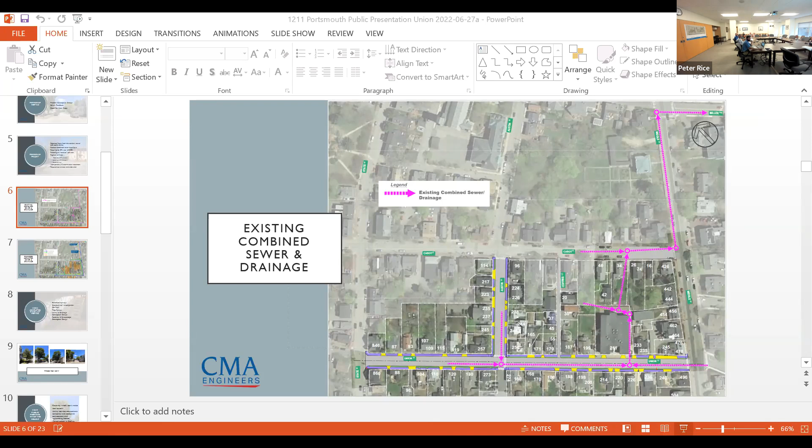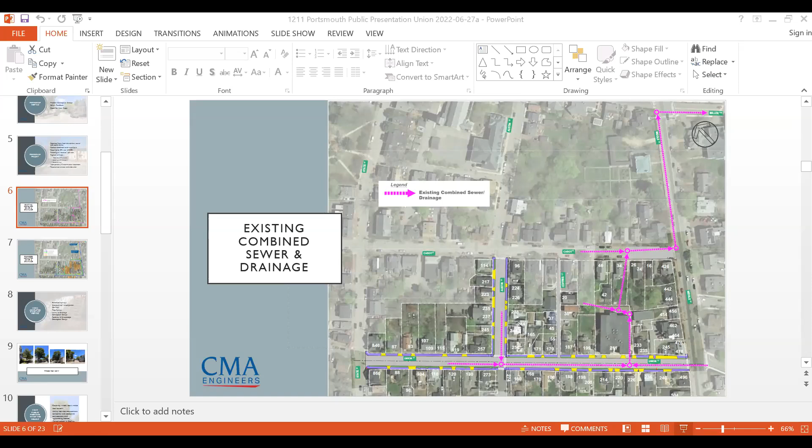Ask Eric. Yes, Eric, are you there? I'm here. What are you able to see? I'm able to see the presentation with the slides on the left. Can you go full screen to make the main slide bigger? There you go. Okay, so this is full screen for you? Yes. Okay, again, very sorry. You'd think we'd know Zoom by now. Well, now we got it.

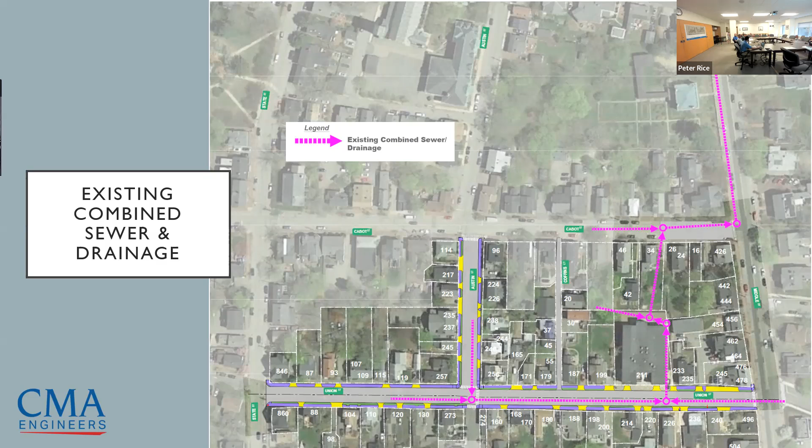So I think we'll revisit some of the non-text slides and graphics. This is the existing combined sewer and drainage. Right now it runs back lot around 211 Union, out by 34 Cabot, out on Cabot Street. One of the main objectives of the project is to separate that water and sewer and also eliminate the back lot run, where people from Coffin's Court and people along both Middle and Cabot all connect back lot across other people's lots to the sewer. So we're going to reconfigure that with what's shown on the next slide, with a new separated drain and sewer where everything's in the public right of way.

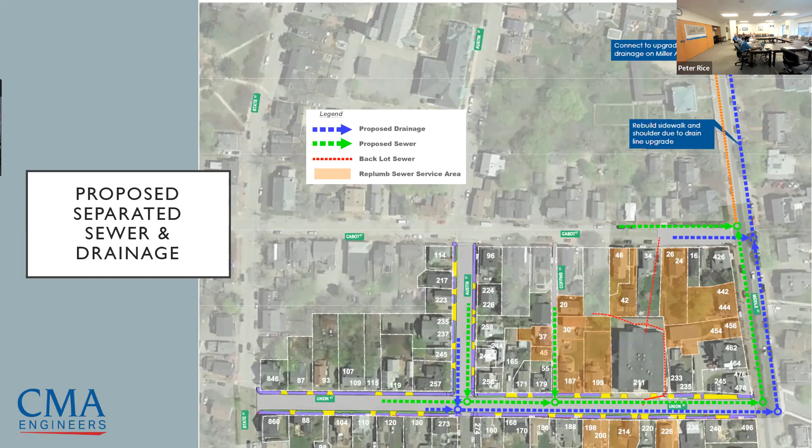So the blue is the drain and the green is the sewer. It'll be entirely new drain connections, since obviously there isn't one now because it's combined, that will connect to an existing drain manhole in Miller Ave, which impacts the sidewalk along the east side of Middle, and then a new sewer main in the right of way. The homes that will likely need plumbing modifications are the ones hatched orange in this slide here. So in order to get your service to connect out into a sewer main in the roadway, you have to reconfigure some of your plumbing to make that work.

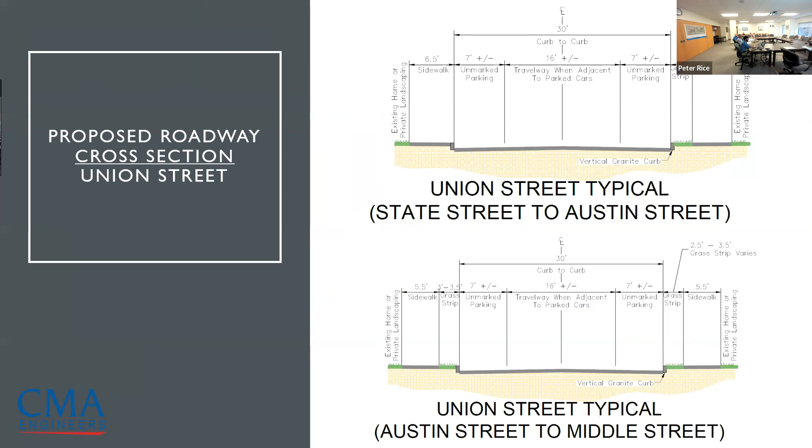Zach, can you jump down to the full roadway layout? Yes, there's some nice trees on the street. So these were the cross sections we spoke about earlier, the Union Street from State to Austin, showing a 30-foot roadway width to maintain more or less what you currently have for roadway width. Sidewalks on both sides, a grass strip on the south side between State and Austin, and then on both sides Austin to Middle for most of it. And then on Austin Street, it'll be like it is today, grass strip on the west side and none on the east side. And there's the layout, which probably most people are concerned about.

Right, so again, you can see the grass strips, and one of the bigger impacts is the no grass strip on the north side of Union between State and Austin, which impacts the trees there. But we're balancing trying to provide a good standard sidewalk that we can maintain with a good curb-to-curb width. And we can accommodate some trees - there are some nice trees, particularly on the southwest corner of Austin and Union - so we're able to maintain those and some sort of grass strip through that stretch.